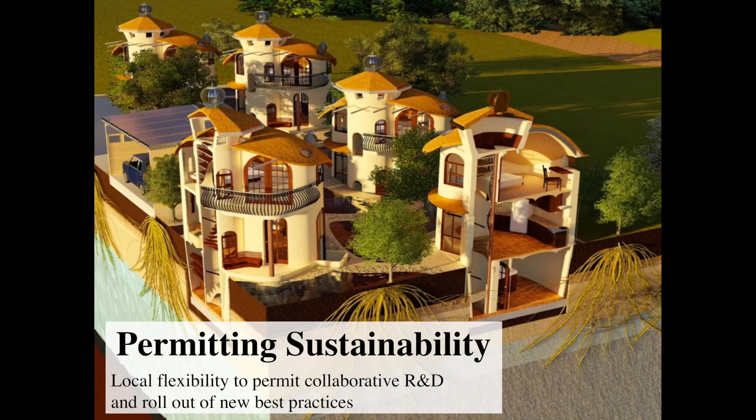Permitting sustainability. I'm going to quickly share an overview of 3 serious problems that your jurisdictions may or may not be considering, and then a suite of promising solutions, which unfortunately cannot easily be permitted. And that'll set up this panel on how to permit these and other solutions that our times are calling for.

So it turns out separate bureaucracies are in charge of structure fires and forest fires. And cities burning like forests falls into the crack between these bureaucracies. So this is the first problem: whole cities are now burning down at once, and there's no agency responsible for this new hazard. Paradise, California is patient zero for this problem.

Consider just the water provider's predicament. 90% of the ratepayers' houses are gone, as well as their employees' houses. And they've got things to deal with, like 64 miles of plastic distribution mains, which were dewatered, overheated, and now permeated with toxins. There's never been anything like this before. No agency knows what to do. There's limited prevention resources for this new hazard, response, or even tracking.

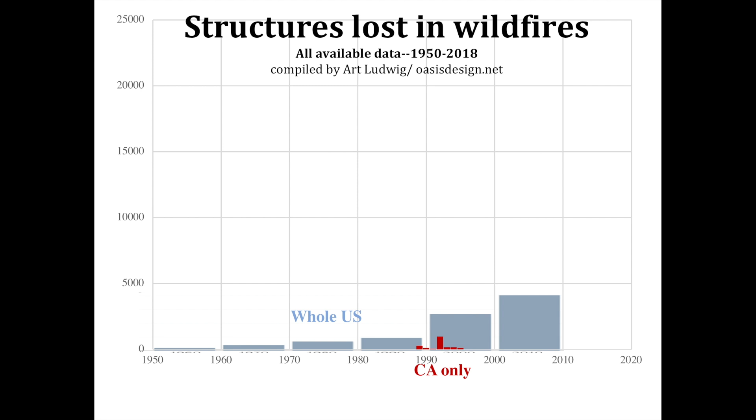I compiled this graph with all the data that I could find on structures lost in wildfires. There was this graph of structures lost nationally in the United States, and I believe this is the first time anyone will have seen a graph of California losses. I found the data from CAL FIRE, and that's our contribution to the national losses, and yeah, that's the last 2 years.

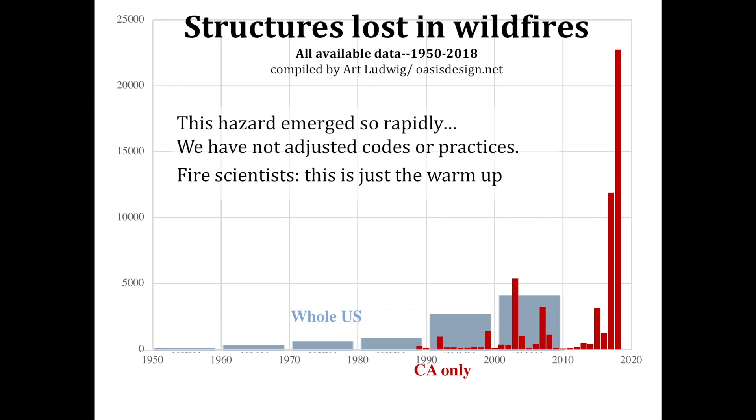So this hazard's emerged so rapidly that we've not adjusted at all with our codes and practices. And what's more, fire scientists are saying this is just the warm-up. They're saying that all of California forests are going to burn down, maybe not come back, and take a lot of the houses with it.

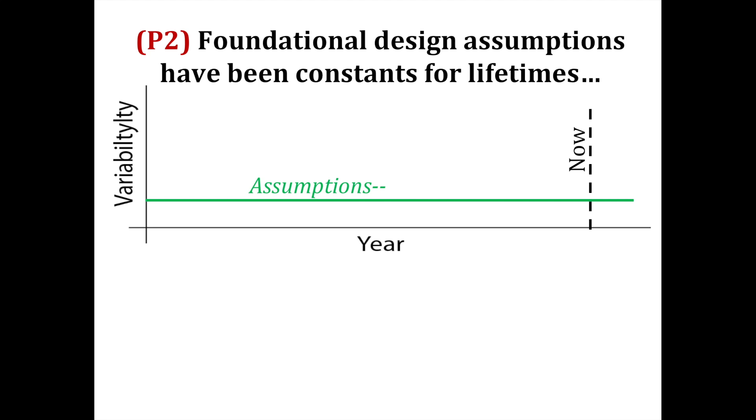This wildfire, cities burning down issue is an illustration of the second problem, which is that foundational design assumptions that have been constants for lifetimes, things like mean sea level, flood and drought recurrence interval, urban firestorm threat, are actually now variables. So the foundation for our infrastructure is design assumptions that are no longer valid.

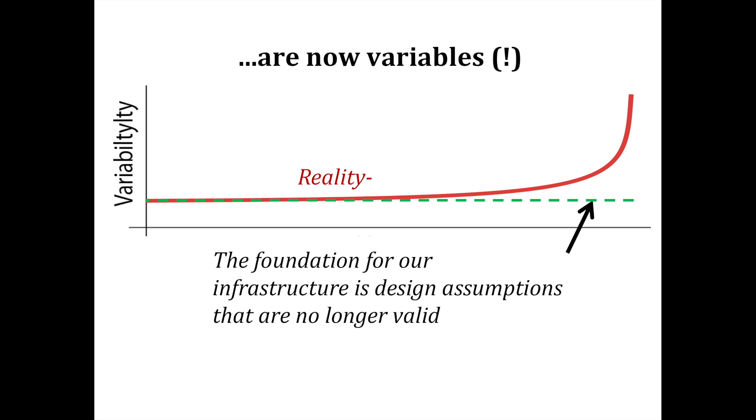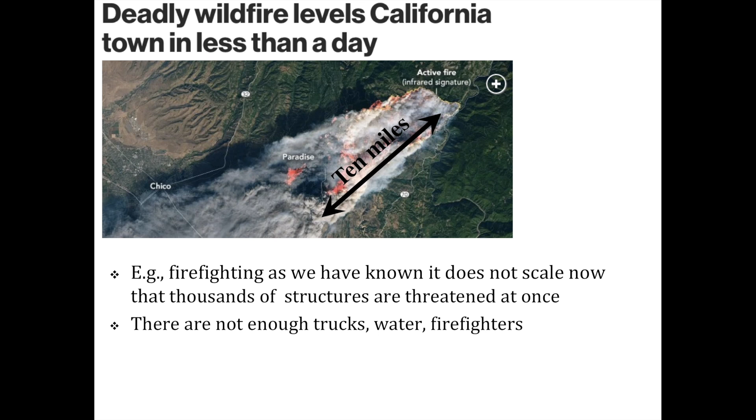We're like Wile E. Coyote that hasn't looked down to see that the foundation of our structures and infrastructure is dissolved. For example, firefighting as we've known it does not scale when thousands of structures are threatened at once. There's just not enough trucks, water, or firefighters. So how could we adapt to these rapidly changing conditions?

Well, that's the third problem. There's no regulatory framework for innovation. It's literally illegal in California to permit anything that is not in the current code. So if you want to come up with the basis for new codes, there's no framework for that.

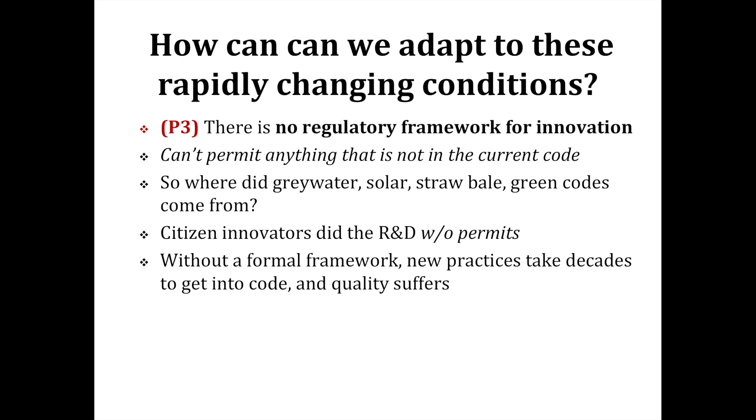So you might ask, where did greywater, solar, straw bale, our marquee green codes in California, where did these all come from? Well, citizen innovators did all the R&D without permits. And without benefit of a formal framework, these new practices take decades to get into code, and quality suffers both for the practices and the codes. So clearly we need a new system to scout responses to these rapidly changing conditions.

Here's this suite of promising solutions for keeping cities from burning down, based on my 20 years of work in this area. First, a fully integrated approach to both forest and structure fires: building, landscaping, water systems, all of it integrated and optimized at once.

Second, non-combustible construction, for example, monolithic adobe for new structures. And this non-combustible construction is equally resistive, regardless if 1 or 100,000 of these buildings are threatened at once.

So this non-combustible construction is a key element, and this is something that's just newly available based on work that I'm going to share with you in a moment. Third element is ultra-high efficiency water fixtures, alternate supply, and reuse. That enables you to downsize water connections by 80 to 95%.

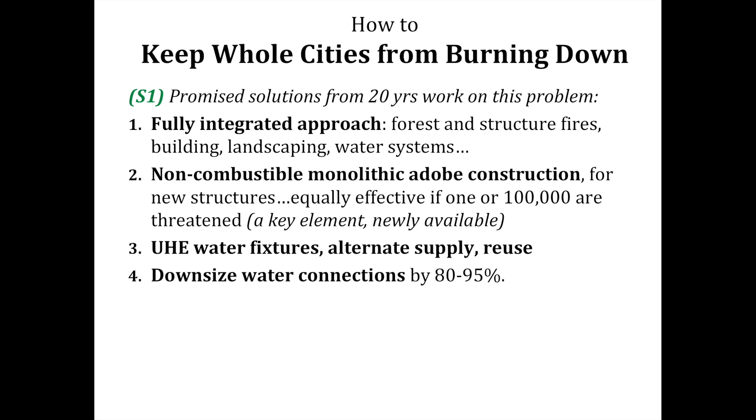We're down to well below 10 gallons per day per capita at our house, and we haven't even implemented all these best practices yet. That leaves water in the mains for low pressure, low volume, automated exterior misters that are sized to the distribution main capacity. Those could be automated so that they turn on the whole side of a city towards the fire and then shut off automatically as the fire front moves on.

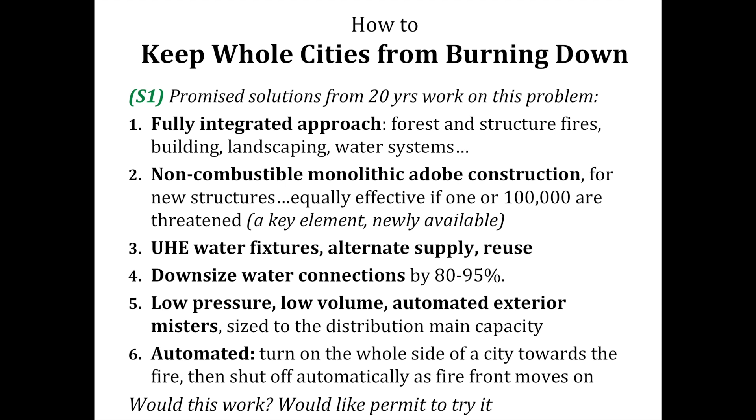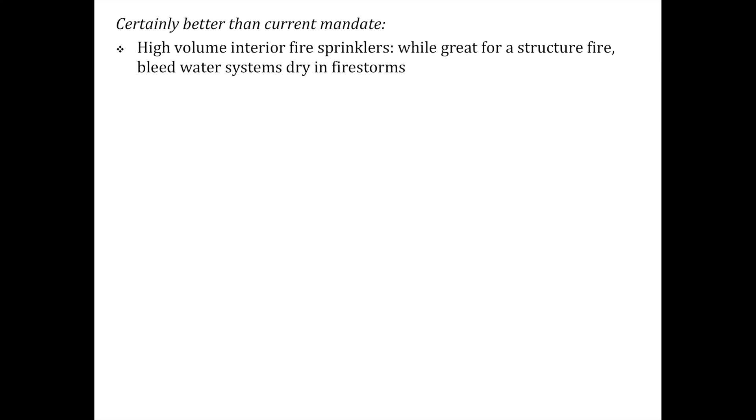Would this work? Well, who knows, but I'd love to be able to get a permit to be able to try some of these elements out. It's certainly better than the current mandate, which is high volume interior fire sprinklers. These are great for a structure fire, but leave water systems dry in a firestorm.

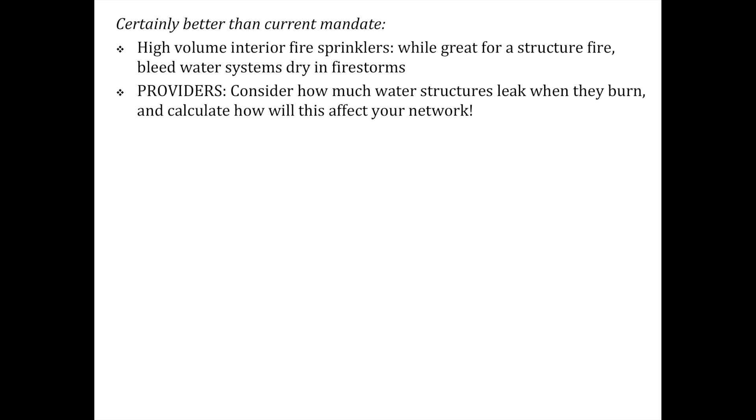With modern fire-resistant construction and interior fire sprinklers, only 50 of them would burn, but the sprinklers are connected through 1-inch fire lines, so you'd only have 0.3 psi of water left in your 8-inch main. If you were to do the non-combustible construction that we're recommending, we're estimating that 10 or maybe even fewer would burn, and that would leave almost the full 100 psi in the water main.

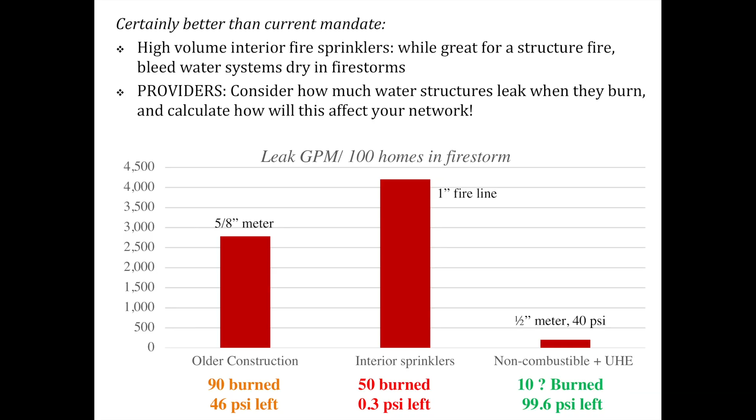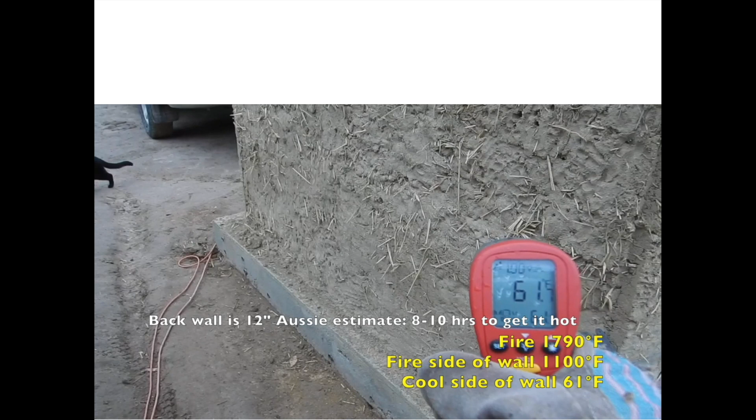So how fire resistant is monolithic adobe? We did this 4-hour test where we burned 2,000 pounds of firewood at 1,800 degrees against the wall for 4 hours, and the heat never reached the backside. And then this big shift is we just got engineering values for all seismic zones in California, and that removes a major impediment to permitting.

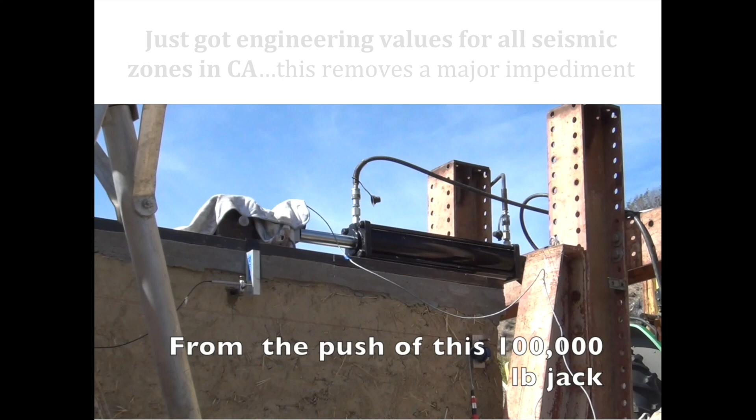Alas, this new best practice is almost impossible to permit with current codes. We're a year into permitting on our Ortega demonstration project. We can get a stamped rational engineering judgment saying that the walls would have a 6-hour fire rating, but there's an inflexible code requirement calling for a very specific $40,000 test to say that it has a 1-hour rating, and it would take 6 months for us to do that.

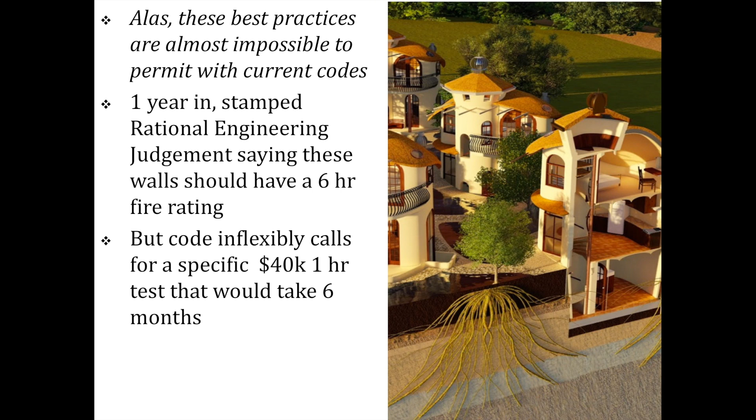So that's just one line of a 1,000-page checklist, which leads us to the second solution in the subject of this panel, which is local flexibility to permit needed new best practices. Flexibility that would allow pilot projects, faster, higher confidence R&D with direct collaboration between innovators, policymakers, regulators, and researchers, limited scale adoption, sensible scaling up as these new best practices are proven, and then ultimately pre-approved plans for mass permitting of fire-safe structures when 10,000 houses need rebuilding at once.